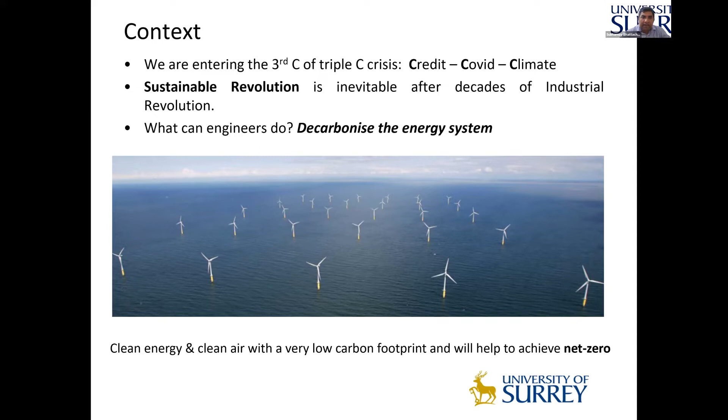Wind energy is not new. It has been used for centuries for sailing ships, sawing wood, grinding grains, and many more things. It is the oldest source of machine power, and this helped certain countries become a big power. In those days, whoever could make the largest number of ships or boats was most powerful because they could explore the whole world. Holland could produce cut wood and sawn wood using wind power, and that made them one of the pioneers of the industrial revolution. They could automate - they are the first country. So again, wind is nothing new.

And it is becoming a big industry - a $1 trillion industry by 2040, even more. So why is it sustainable? Because wind will blow as long as the sun is shining, since it is the sun that hits the land and water differentially, and that differential creates a change of pressure which drives the wind. So wind will always be there - as long as we have a solar system, the wind will be there.

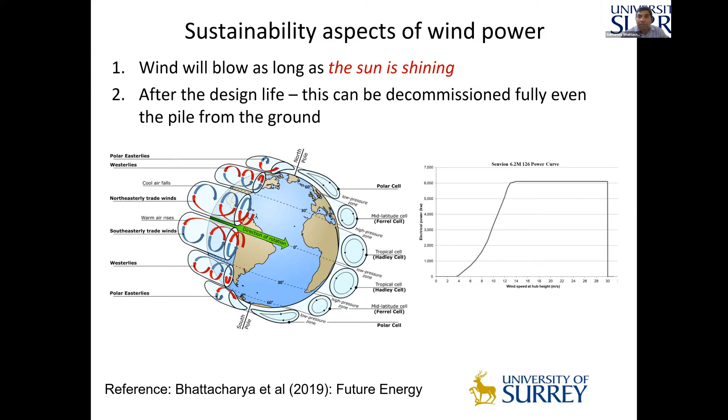Just to give an example, here is one of the first wind farms - this one is only a 500 kilowatt machine, so half a megawatt. It was built in 1992 and dismantled in 2016 after its full design life. I will show you this little video to show how we could completely decommission it from the sea - after harnessing the energy for its lifetime, we could completely dismantle the whole thing and give back the sea floor as it was.

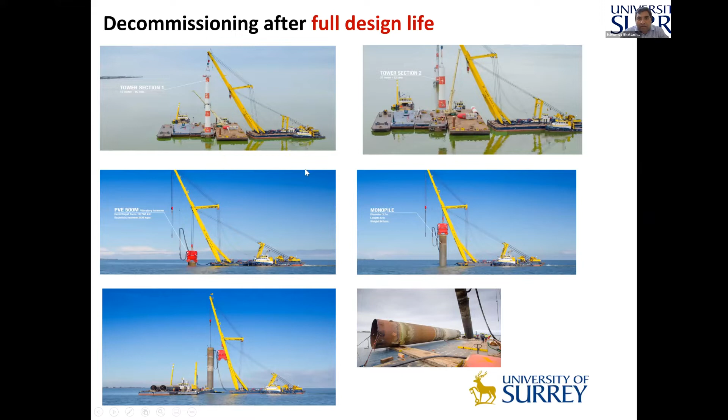So here are the steps for how to decommission. First of all, we take the top part out, the tower section, and then we gradually take the pile out of the ground. Okay, here's a little video.

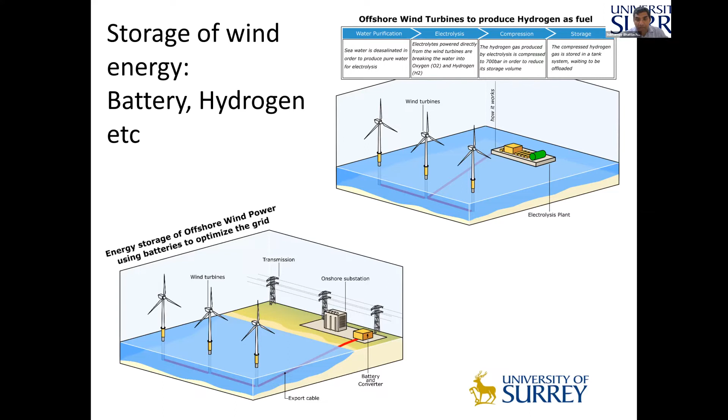This is one of the very important points of conflict. Some countries which produce oil are not politically stable, which creates problems.

Again, on the backdrop, it is wind that can produce the hydrogen and run the economy. So what I'm showing in the first part of this talk is that wind is a sustainable, possible solution for net zero, and it can facilitate the green hydrogen economy. The next economy will be the green hydrogen economy.

Also, what I'm not covering here is that nuclear power plant accidents are actually all linked with cooling power. What I've shown in some of my papers is that you need stable cooling power to make power plants safe in seismic areas, and wind turbines can provide that stable power.

There are also floating turbines as well, so that you can harness energy from deeper water, but that's for another day. You can read some of the papers in the reference for an idea about all these things. There are also some books that talk in a more general way about wind power and how it can help reduce the effect of climate change.

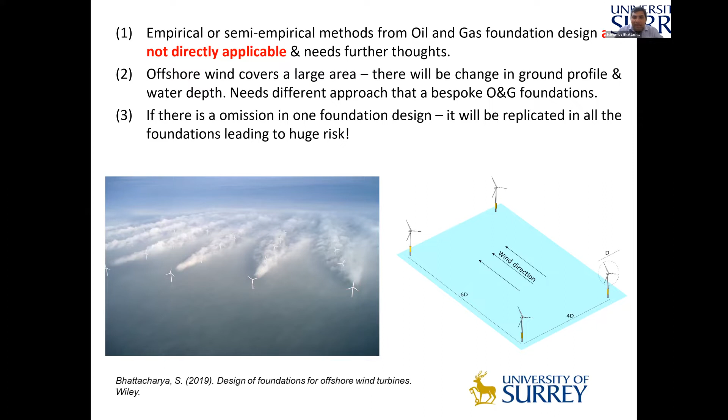As turbines get larger and larger, the tower gets longer and longer. Looking at an 8 megawatt turbine, it has a 110 meter long tower. At the top, you have a 550 ton mass, and each blade weighs roughly 30 tons. That's why they're built offshore, because you can easily bring these things offshore and put them there rather than onshore. Onshore, you can't scale it up as easily; it's very difficult to transport and carry large pieces of equipment, because the roads are not ready to carry big stuff.

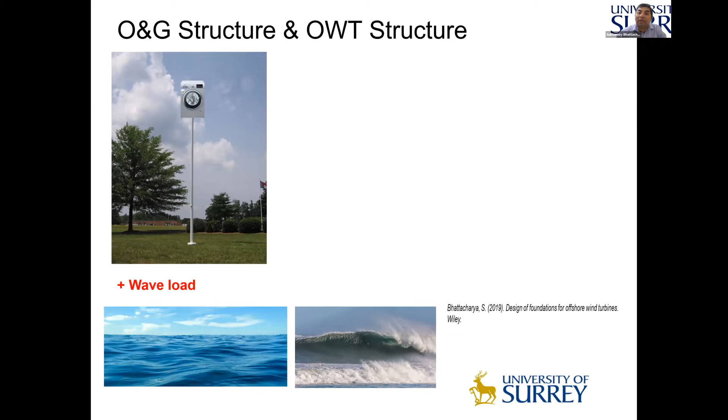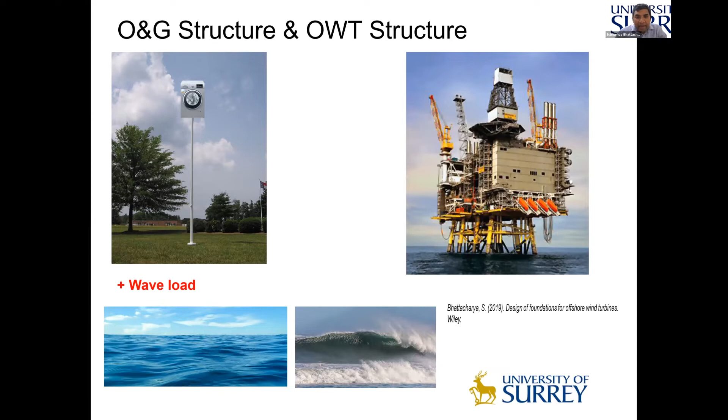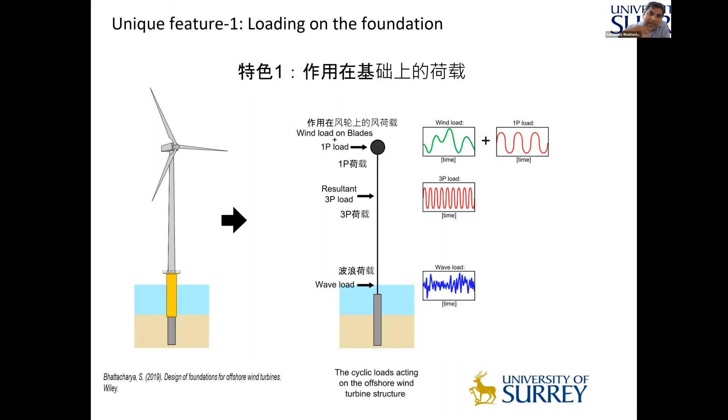The next big load is wave load, because if you put the structure in the sea, there will be waves slamming it, giving wave load. Apart from that, these are large machines, and you often have an imbalance of mass, which gives you a 1P load. There is also load on the tower, known as 3P tower load. These are the loads acting on the turbine all the time.

Let's look into the loads for just one minute. At the hub level, you get load from the wind, which can be thrust, and also imbalance of the blades. You also get wave loads at the bottom part, shown as a dynamic wave load, and then you get a 3P load in the tower. That's the load.

Because we have to have economy of scale, typically these days wind farms are about one gigawatt, meaning 1,000 megawatts of power. So you need a large area, and we are also farther away from the shore. As you go farther from the shore, the foundations also change.

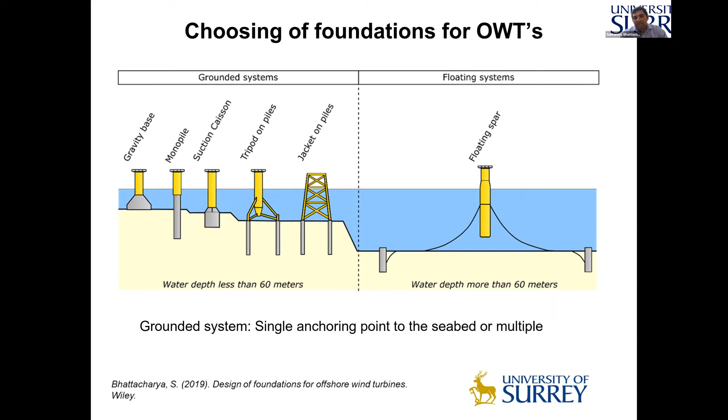In shallow water, in good soil conditions, you'll put a gravity base. As you go deeper, you start to put a monopile, meaning one large diameter pile. Then you use suction caissons, then move on to tripod, a jacket on pile. At 60 meters or more, you start to go into a floating system.

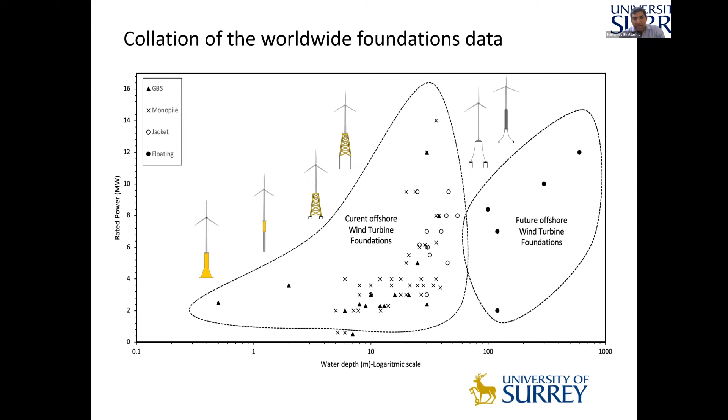Here is a figure showing water depth. In some places where the depth is more than 100 meters, you will only go for a floating system. This shows the current types of structures being used, and as water depth increases, you move from gravity base to floating. You can read all the design details in this book, published two years ago, which gives quite a bit of detail about the design and different parts.

What I am picking up here are the important points related to seismic design. One important part is the serviceability requirement for design, meaning these structures are typically designed for 30 years. So we have to predict the amount of tilt over the lifetime. In a seismic area, if the ground is liquefiable, there can be a tilt in the whole design.

How do you create the tilt, and what do we do to keep the tilt within a desired limit? There's a thing called the limit of warranty, which is theta limit - meaning the warranty is lost if that is breached. Typically 0.5 degree or 0.75 degree is the amount of tilt allowed after an earthquake or under any condition. The reasons matter because if the wind turbine tilts, there can be quite a few problems.

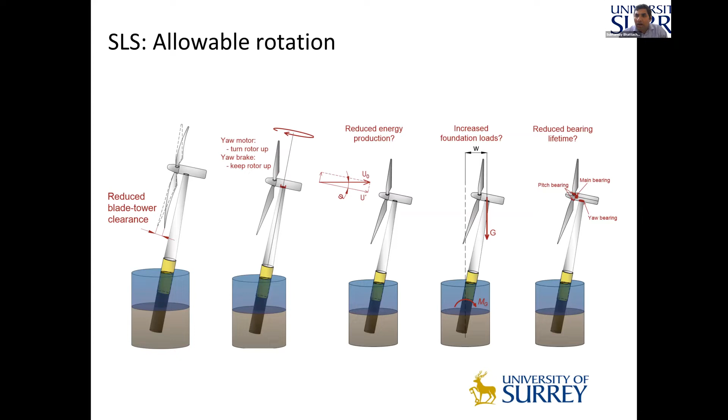For seismic design, the important part is the RNA acceleration. During an earthquake, one thing we must ensure is that the top machine does not accelerate more than 0.2G to 0.4G. There is still discussion about the exact amount, but typically 0.2G to 0.4G is the acceleration allowed at the top. So we have to make sure, through adequate stiffness or however we do the design, that this is not breached.

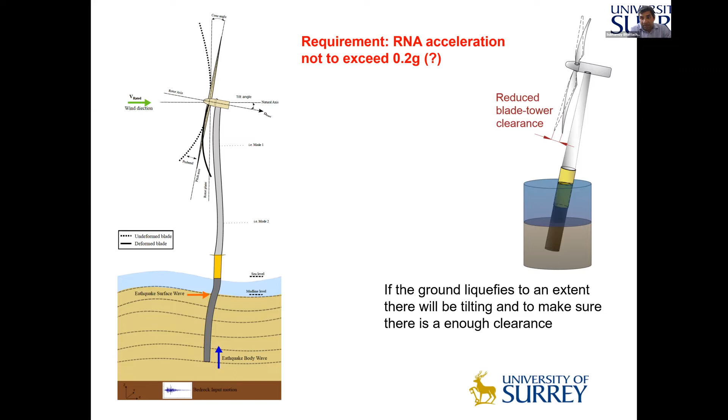Also, due to liquefaction, there can be some tilting. In terms of overall design considerations, there are quite a few: ultimate limit state, serviceability limit state, modes of vibration, fatigue limit state, as well as how you install, how you remove, robustness, and economics.

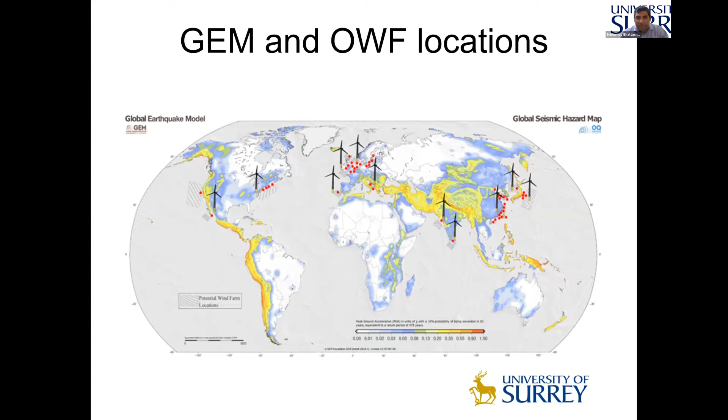So the main thing is we are building wind farms where there are quite a few issues to do with fault movement, shaking, and liquefaction, which can lead to various problems, and the risk increases as earthquake intensity goes higher. There can be a tsunami as well if the earthquake is more than 7.5 in some situations. So as a designer, one has to go through all the different steps to make sure the RNA acceleration is not exceeded and the structure doesn't tilt more than 0.5 or 0.75 degrees.

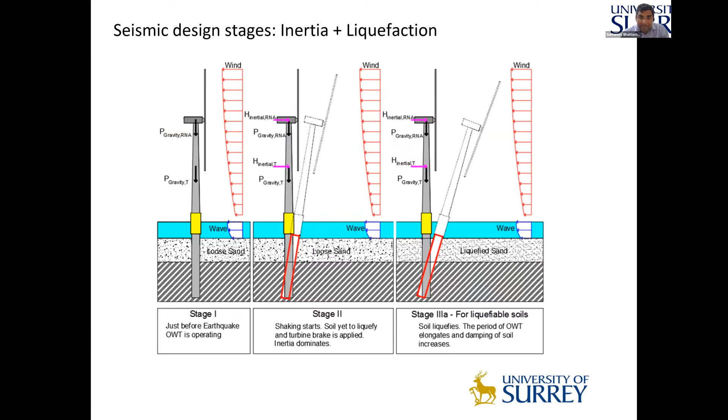Here are the different stages, and they are put on here. So one important part is how do you combine the effect of wind, wave, and earthquake?

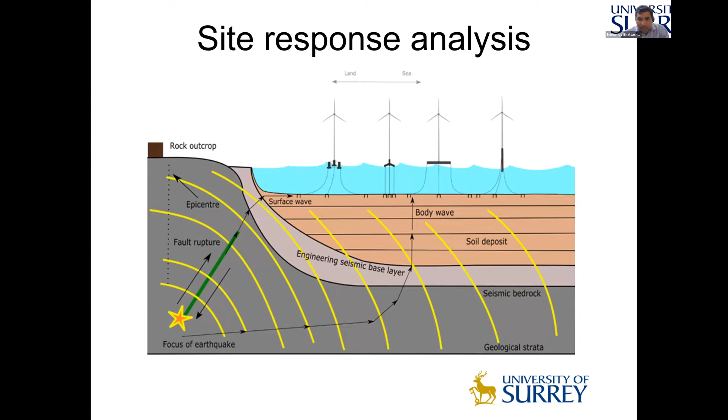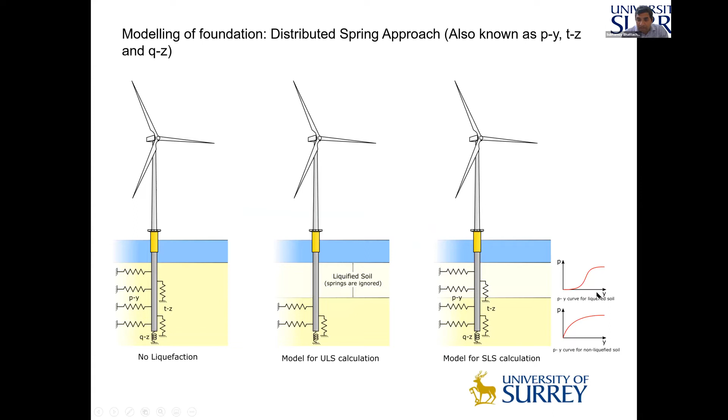We have to do a site response analysis to find out what happened to the ground. We have to put PY curves, but make sure that the PY curves comply with the requirement, meaning you must have zero resistance at the top, at small amounts of Y. So that's the PY curve for liquefiable soil, which must be used. You can read about this in a particular book, which I authored a couple of years ago.

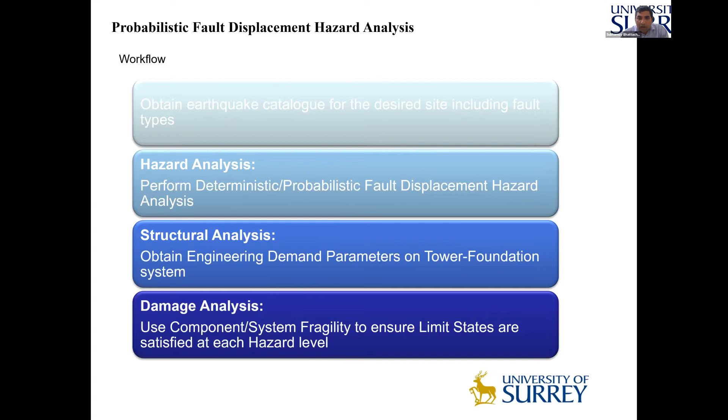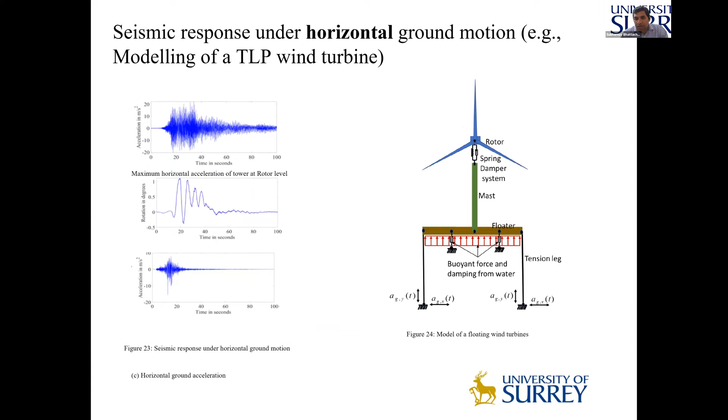For floating systems, we got to find out the fault rupture. We have to understand how much a fault rupture can induce movement in the whole system, and we can do the analysis based on that and provide adequate safety fuse and other things. Again, we have some analysis of the tension leg platform, giving a ground motion to see how it behaves, and that's for tension leg platform analysis.

To conclude, offshore wind turbines are an important component of future energy systems. We have to look into these systems more carefully. SLS criteria dominate the design. The important steps are assessment of seismic hazard at a given site, selection of strong motion, load combination criteria considering wind, wave, earthquake, and the control system design.

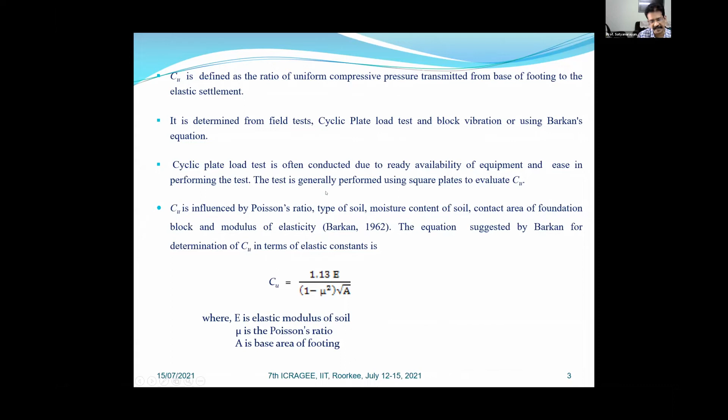So we can calculate, but finding elastic constants, particularly mu and E, requires precise testing in the laboratory. That's why the more common test that is done is the cyclic plate load test.

Looking at the definition of CU itself, P by Se, under a given pressure, the elastic settlement is definitely influenced by the shape of footing because of the pressure bulb. The shape of pressure bulb for square footing and circular footing is different. So for a given pressure, we are not going to have the same elastic settlement in a given soil, and hence CU is going to be affected.

So there is a need for evaluating a shape factor so that we can switch from values of CU determined for square test plates or square foundations to circular foundations.

Also, industrial establishments generally take place in the suburbs of cities or metropolitan areas, where you may have low-lying areas, and a lot of filling will be done. So generally conventional fill materials are used and compacted in layers, but due to increased demand and scarcity of conventional fill materials, people are planning to use alternate marginal soils, particularly in coastal areas.

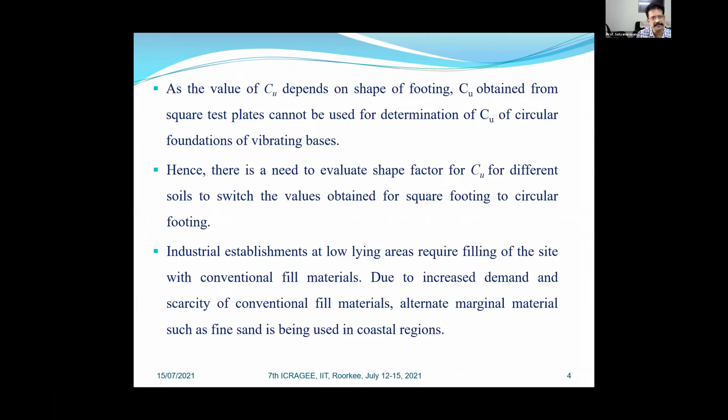Fine sand is predominant there, so efforts are being put to improve its properties, particularly to make it more resistant to possible liquefaction under saturated state. It is being stabilized by adding synthetic fibers.

So in the present study, an attempt is also made to evaluate the effect of shape of footing on CU of fiber reinforced fine sand.

Polypropylene fiber is used in small scale cyclic tests, because if at a site the prevailing soil is saturated clay, it is always practice to replace such saturated clayey soil with a granular fill. So if we are going for usage of fiber reinforced fine sand, we should also have knowledge on how CU changes and what the shape effects on CU are.

So the present lecture addresses all these issues.

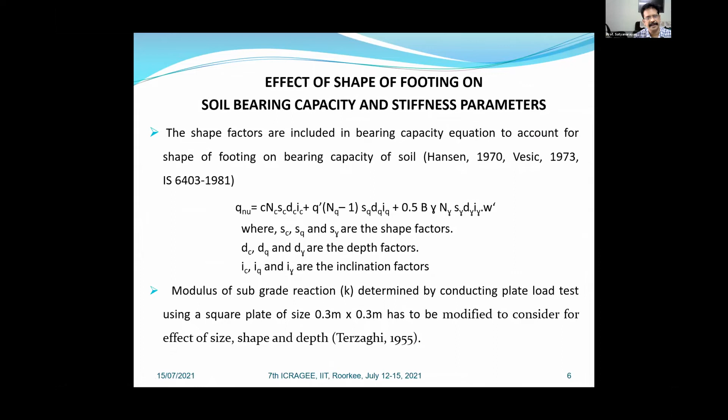As all of you know, the bearing capacity expression given by Hansen and adopted by our IS code, the net ultimate bearing capacity expression has factors including the effect of shape of foundation. Similarly, the modulus of subgrade reaction, which we determine from plate load test, we correct for size, shape, and depth. Similarly, our CU is also a stiffness indicating parameter, and the influence of shape needs to be accounted for.

So in the present study, we have studied the variation of CU for square shaped test plates and circular shaped test plates in 3 different soils, namely fine sand, clay of low compressibility, and clayey sand.

They are procured from sites within the Visakhapatnam city limits. Sand is collected from the beach near Tenneti Park area, and cohesive soils are procured from locations near Pedawaltair area, which is closer to Andhra University.

The properties of fine sand determined from laboratory tests are presented in this slide. It is containing 99% of sand particles, looking at coarse sand, medium sand, and fine sand fractions. Fine sand fraction is predominant, 68%, and fines are only 1%.

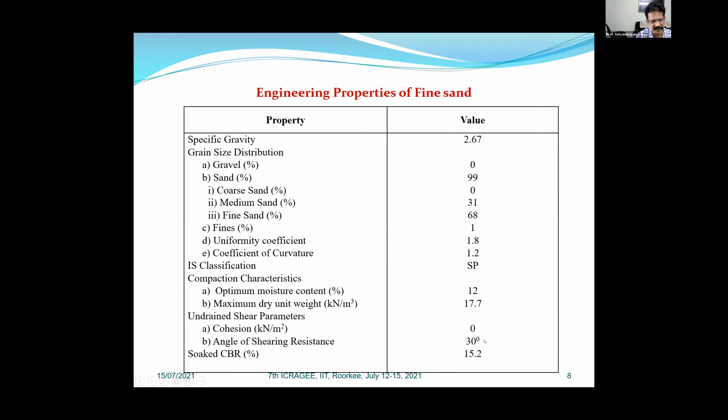Coming to gradation characteristics, CU is 1.8, CC is 1.2, and it got classified as poorly graded sand. Under heavy compaction conditions, the optimum moisture content was obtained as 12% with maximum dry unit weight of 17.7 kN per meter cube, and it had angle of shearing resistance of 30 degrees when tested in direct shear apparatus. CBR value, though determined, is not related to our present study, so I'm not mentioning it here.

Coming to the other two cohesive soils, one is clay of low compressibility, the other is clayey sand. Clay of low compressibility has fines of 84%, liquid limit 33, and it has undrained cohesion of 56 kilonewton per meter square with low angle of shearing resistance. Clayey sand has fines of 14%, liquid limit 32, and it has undrained cohesion of 16 kilopascals and angle of shear resistance of 25.

So these three soils are chosen for carrying out determination of coefficient of elastic uniform compression with respect to square and circular shaped test plates, as doing plate load test is laborious and time consuming.

So we made an attempt to do small scale cyclic load tests similar to cyclic plate load test in the laboratory, using the loading frame, using the CBR plunger of diameter 5 centimeter, and using a square plunger made with MS plate, having the size same as that of the CBR plunger, which is 5 centimeter. Only thing is CBR plunger is circular, the fabricated one is of square cross section.

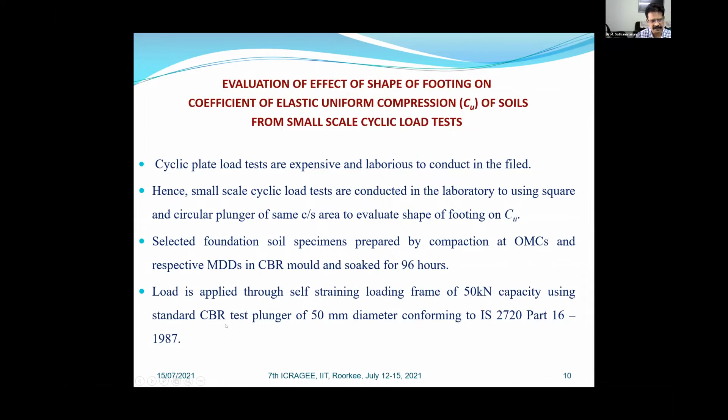So the load test is done in a 50 kilonewton self-straining loading frame, first with usage of the standard CBR test plunger. The load is applied on the specimen due to movement of the loading platform in upward direction, making the specimen compress between the proving ring and upward moving platform, which is measured with the help of a proving ring.

A surcharge plate of 5 kg is placed at the specimen surface, particularly in fine sand. Unless we confine it, its response we cannot properly get. Not only that, during soaking, unless there is some surcharge, there will be loosening of soil near the surface. For that, uniformly a surcharge load of 5 kg is used.

Prior to actual loading, a seating load of 7 kN per meter square is applied, and then the load is applied in increments of 1/10 of the selected test load. The selected test load is 200 kN per meter square and 150 kN per meter square, respectively, in fine sand and cohesive soils, because these values can be taken from any codes or literature. Presumptive bearing capacity values only are taken, as our intention is to study the elastic response of soil, so pressures of the order of expected bearing capacity in such soils are taken.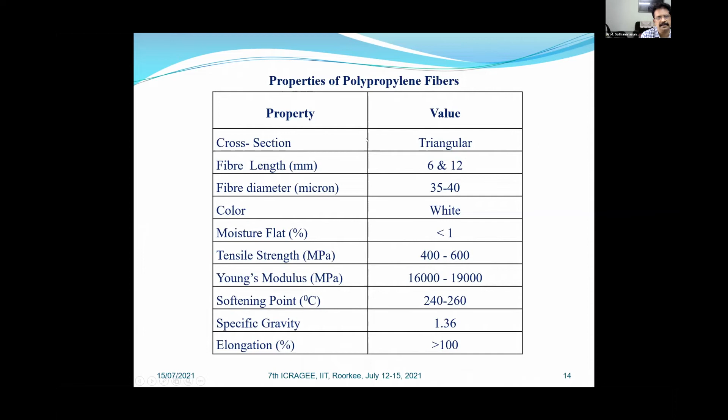Synthetic fibers used are of polypropylene origin, procured from Recron. 6 mm and 12 mm length fibers are used while reinforcing fine sand with fibers. All the properties reported here are adapted from the manufacturer sheet.

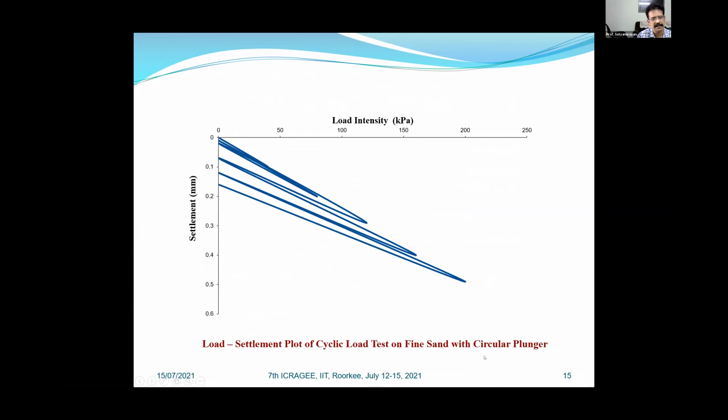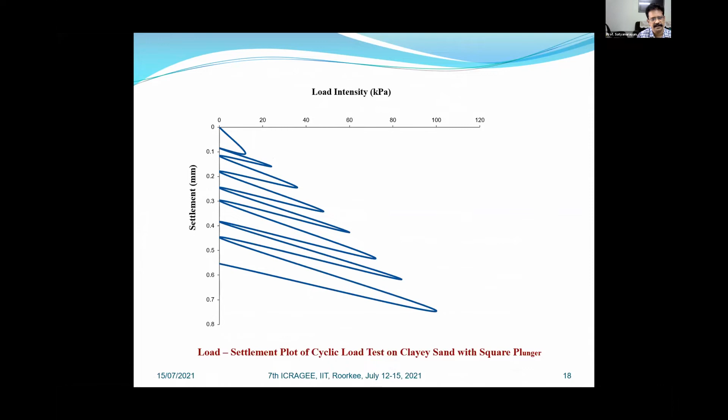These are the load settlement plots generated from small scale cyclic load tests performed on fine sand with circular plunger and square plunger. This is with regard to small scale cyclic load tests performed on clayey sand with circular plunger and square plunger, and on clay of low compressibility with respect to circular plunger and square plunger.

From this, plots are made between applied load intensity and elastic settlement. Since the intensity of loading selected is of the order of presumptive bearing capacities, the best fit is observed to pass through all the points, and the plot is observed to be almost linear.

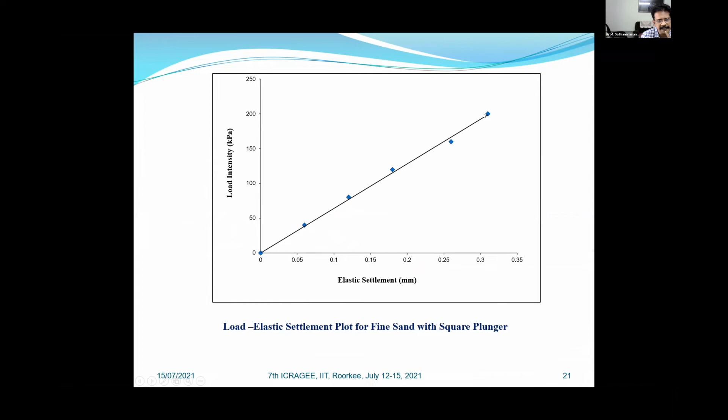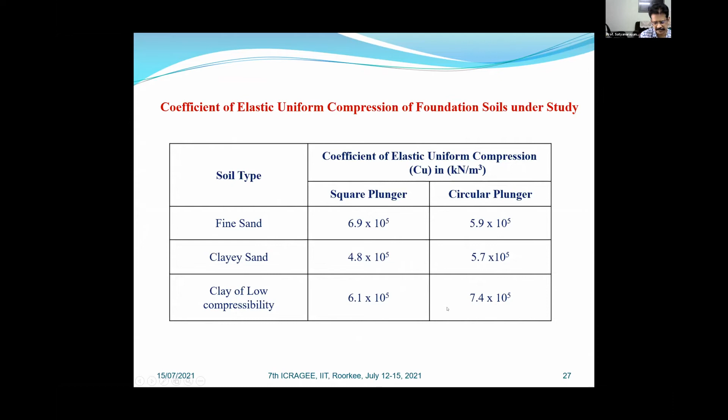Using the best fit lines and taking the slope, the values of Cu are worked out for the soils under study, namely fine sand, clayey sand, and clay of low compressibility. In fine sand, the value of Cu with respect to circular plate is smaller compared to square plunger, whereas in cohesive soils, that is clayey sand and CL type soil, for circular plunger, Cu value is more compared to square plunger.

If you take the ratio of values of Cu with respect to circular plunger and square plunger, the ratio is about 0.85 times. The reason for lower value of Cu for circular loading plunger is that the elastic modulus of sand underlying square loading plate will be higher compared to circular footing, because the base area is more, so more frictional resistance will be mobilized between the base of the loading plate and underlying soil, and more restrainment will be there to particles under load application.

Because of that, there is a lesser value for Cu with respect to circular shaped loading plunger. Coming to cohesive soils, as we know...

Even in terms of bearing capacity, irrespective of size of the foundation, the bearing capacity of soil is same. So for a given pressure P, if you look at the volume of soil contributing to settlement, in case of cohesive soils, more soil will be falling within the pressure bulb corresponding to the square plate. That's why, in the denominator, settlement is going to be more for cohesive soils receiving load through square plunger or test plate, and hence they will have lower value of Cu. That's why circular plate had a higher value. So the shape factor, taken as ratio of Cu of circular to square, is obtained as 1.2.

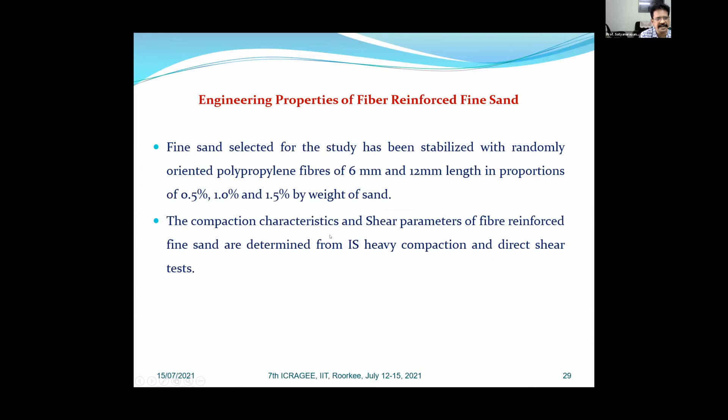After this, the study is extended to evaluate the effect of addition of polypropylene fiber of 6 mm and 12 mm length in various proportions of 0.5%, 1%, or 1.5% by weight of sand. To arrive at the optimum percentage of fiber, direct shear tests are performed to find where the angle of shear resistance is maximum.

For conducting direct shear tests, we need to prepare specimens corresponding to OMC-MDD condition, so heavy compaction tests are performed. You can see that, with regard to a given length of fiber, as percentage fiber content increased, OMC values increased gradually and MDD values decreased. Same is the case with the 12 mm fiber length also.

You can observe that a slightly higher value of OMC is there for 12 mm fiber compared to 6 mm, and the values of MDD are slightly higher compared to the values achieved for 6 mm fiber. The reasoning for this trend: lesser OMC requirement for 6 mm is because of its short length, it gets easily dispersed in soil, giving ease in compaction and allowing you to reach maximum density with respect to that particular fiber.

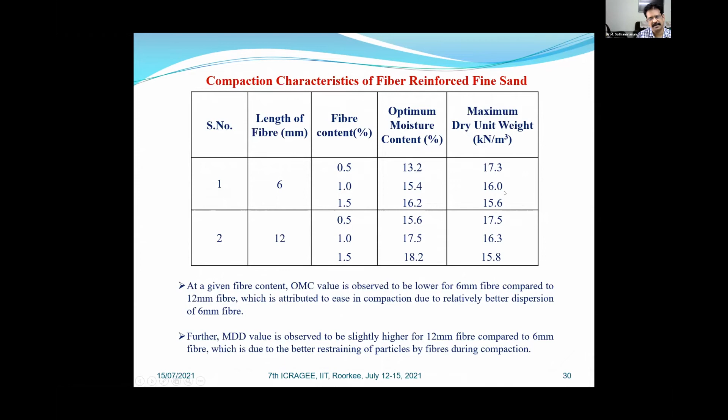Coming to 12 mm length fiber, it offers better restraining of particles, and whatever compaction energy is given becomes much more effective, resulting in better packing of particles. Though the values are nearer, there is a marginal increase, which we can attribute to the restraining effect of 12 mm fiber because of its higher aspect ratio compared to 6 mm.

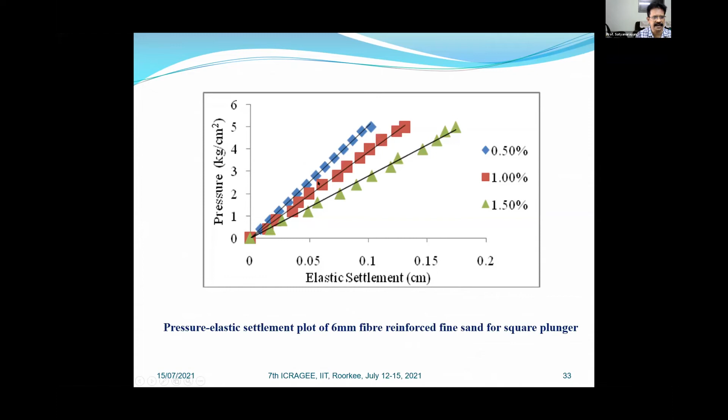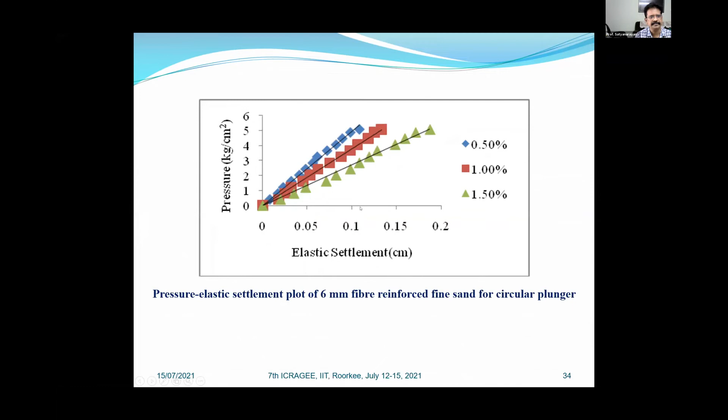Small scale cyclic load tests are performed on fiber reinforced soils using 6 mm and 12 mm fiber lengths, for both square and circular plungers. As percentage of fiber added to soil increased, the slope of pressure versus elastic settlement decreased, and the value of Cu is decreasing with increase in fiber content. You can see the same trend even with circular plunger.

Coming to 12 mm fiber reinforced fine sand, also same trend. For a given fiber length, as fiber content increases, the values of Cu are decreasing both for square and circular. With respect to square and circular, values are not differing much, meaning there is no shape effect as seen in case of fine sand.

The values of Cu are decreasing with increase in fiber content, irrespective of shape of plunger and fiber length. This we can attribute to increased elastic compression resulting from fiber replacement in fine sand. Compared to fine sand particles, polypropylene fiber is compressible.

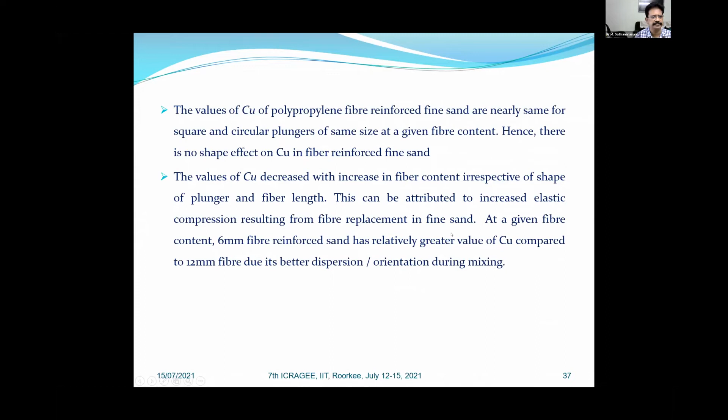Based on this study, the conclusions which we can draw: the value of Cu for circular vibrating base or foundation can be taken as 0.85 times the value of Cu of square vibrating base or foundation. In case of cohesive soil, like clay of low compressibility and clayey sand, the shape factor to transform value of square footing to circular plate is 1.2.

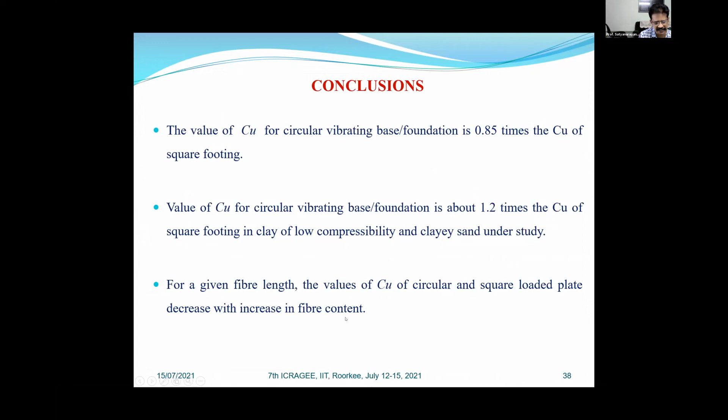For a given fiber length, the values of Cu for square and circular loaded plate decrease with increase in fiber content. In case of fiber reinforced sand, there is no effect of shape - whatever values we determine for square footing, we can use for circular footing. At 1% fiber content, the values of Cu for 6 and 12 mm fiber are decreased by 40% and 58% respectively.

I thank the organizing committee for giving me this wonderful opportunity to share some of our work related to coefficient of elastic uniform compression. Thank you. If there are any questions, I'll be happy to take them and try to answer.

Thank you very much, Professor Satyanarayana Reddy, for a very informative and interesting talk. I request Vikas to quickly take 1 or 2 questions. There is no question in the question session. But I have one question for you, sir.

What is the effect of aspect ratio on this Cu value? If we change the aspect ratio of fibers, what is the difference in the value of Cu we can see? Cu is decreasing - the last conclusion I have shown, I think. Shall I show that presentation? Values of Cu for 6 mm and 12 mm decreased by 40% and 58%.

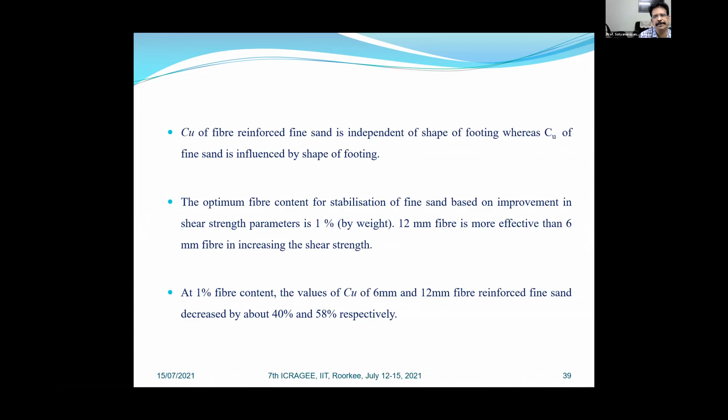Is there any effect of orientation of fiber? This is randomly oriented, because we cannot keep fiber in a particular orientation, just like reinforcing sheets. It is randomly distributed fiber reinforced sand. Thank you very much, Professor Satyanarayana Reddy.

One small question - any recommendations for field? Because you must have done this lab test, when you apply this in field, how to do it practically? The mixing of fibers may not happen properly, and to what depth? Just like our reinforced soil bed, we replace weak soil to a depth of about B to 1.25 B. So there we can replace clay soil with fiber reinforced sand and achieve its benefits. Thank you very much for a very informative lecture.

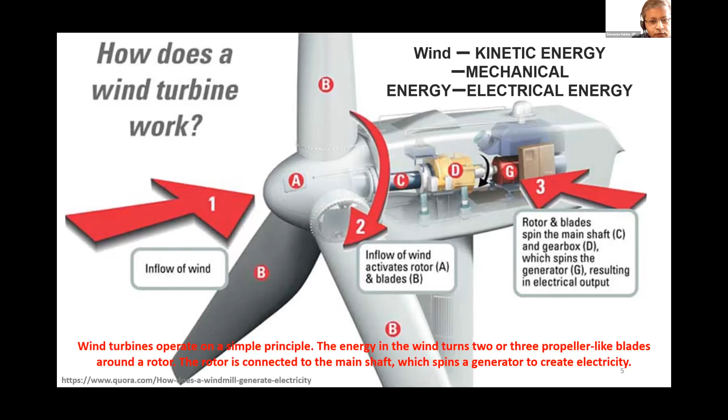So this is how a wind turbine works - it's a very simple methodology. Basically, wind energy as kinetic energy is converted to electrical energy due to the rotation of the propeller. It's mostly a three-bladed wind turbine, horizontal axis wind turbine. And these are the components of the offshore wind turbine, which you've already seen in the last presentation.

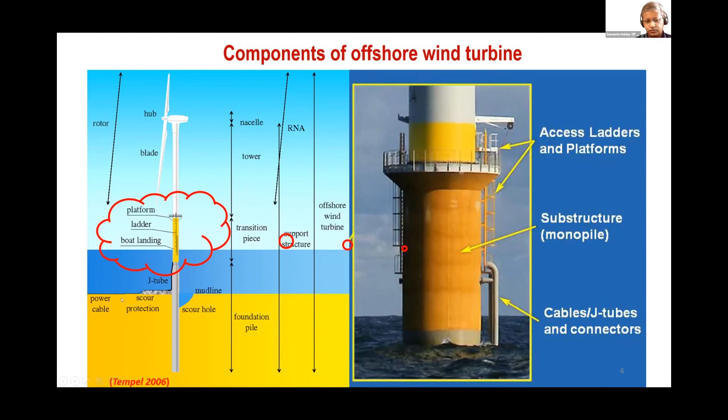The future trend, as explained in the previous presentation, is moving towards very large capacity wind turbines. We started with a small range of wind turbines, but now we are looking into large wind turbines. As the wind turbine capacity increases, it will also substantially increase the size, the rotor diameter, and the height of the wind turbine enormously.

Bigger, cheaper, and greener turbines can produce more wind energy. As wind energy and wind turbine size increase, design challenges will also increase. I'll talk about a couple of important design challenges in seismically active areas, and then discuss the requirements of foundations related to seismic liquefaction and other issues.

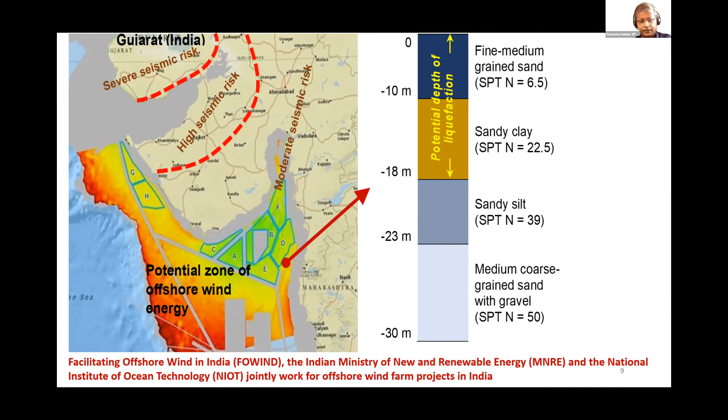In addition, there are various other loads, as already shown, including a combination of wind load, wave load, and seismic load. If liquefaction happens, that may give an additional challenge to the designer. These are a couple of common things already explained, so I won't talk much about these loads on the wind turbine.

As we know, the wind turbine can have several types of load components. At the hub height, there is thrust load, and tower drag acts on the tower side. Similarly, wave load acts at the mean sea level, and current load may also act. These are the general operational loads that act on the wind turbine.

In addition, there is the 1P load, which depends on the rotational speed of the wind turbine. It is more or less due to mass imbalance of the wind turbine blade, and the 1P load generally acts in the side-to-side direction.

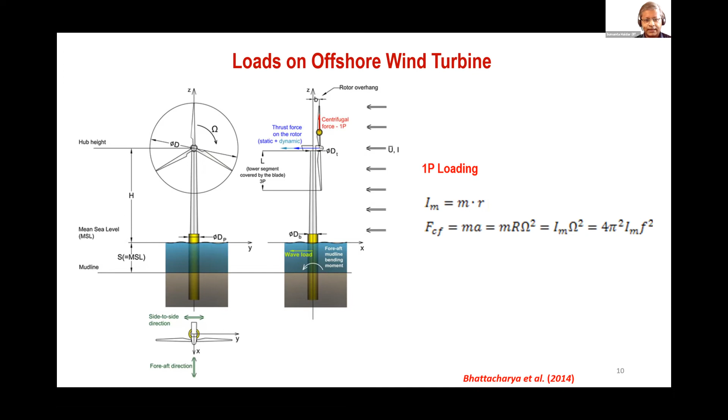Another type of load is called the 3P loading, due to the tower shadowing effect. When the blade rotates and covers the wind turbine tower, because of this shading effect, the frequency of the load is 3 times the operational frequency. The 3P load and the hub load can be estimated based on thrust calculation.

Similarly, wave load may also act, which is dynamic in nature. Various wave theories are applicable for different types of water depth. For different water depths, you can apply different wave equations to find the wave loading. I'm not going into the detail of wave load calculation.

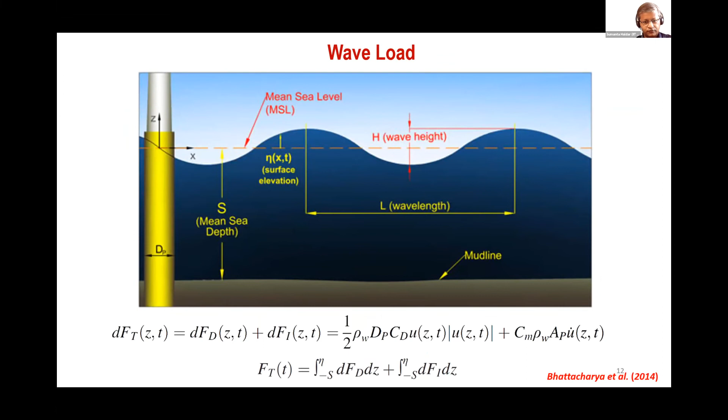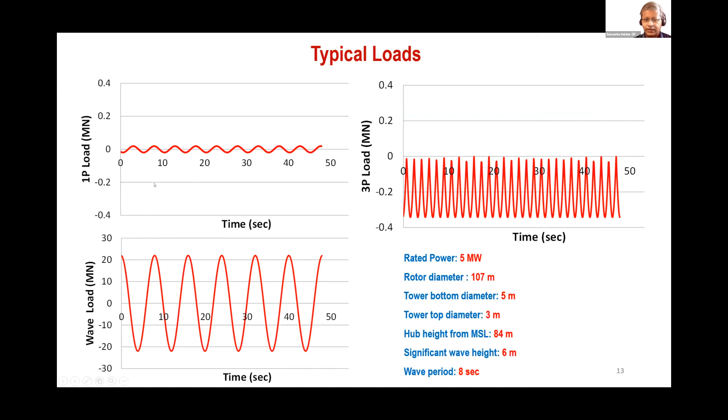These are the typical loading patterns. The 1P load pattern is a kind of cyclic, harmonic load, while the 3P load is a one-way cyclic load, along with the wave load. These are the estimated loads and their typical nature during operational conditions. In addition, in seismically active areas, we need to consider the seismic load.

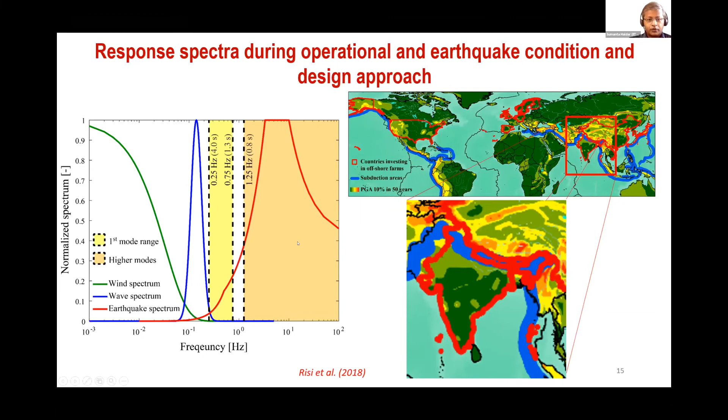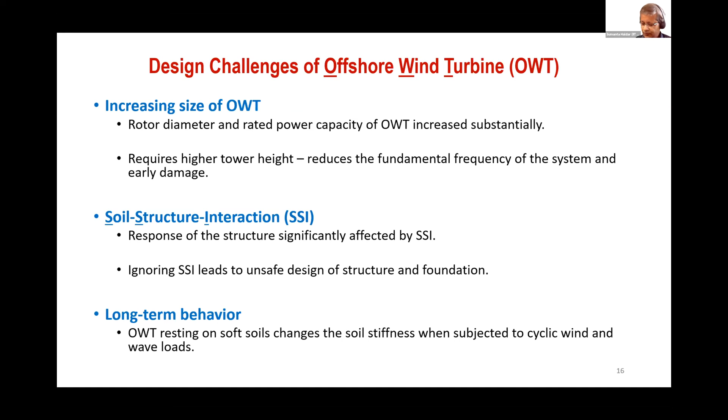The design challenges mostly lie with the size increase. As the size increases, it can reduce the fundamental or natural frequency of the system, which may lead to early damage. The next interesting issue is soil structure interaction—ignoring SSI may lead to unsafe design of the structure and foundation, and we have already done a couple of studies on that. The third and most important part is long-term behavior: the offshore wind turbine is exposed to millions of load cycles, and it's very challenging to determine what happens to soil stiffness under such high cyclic loading.

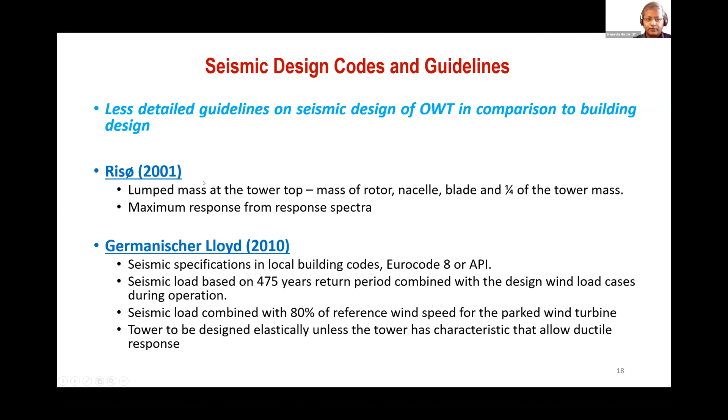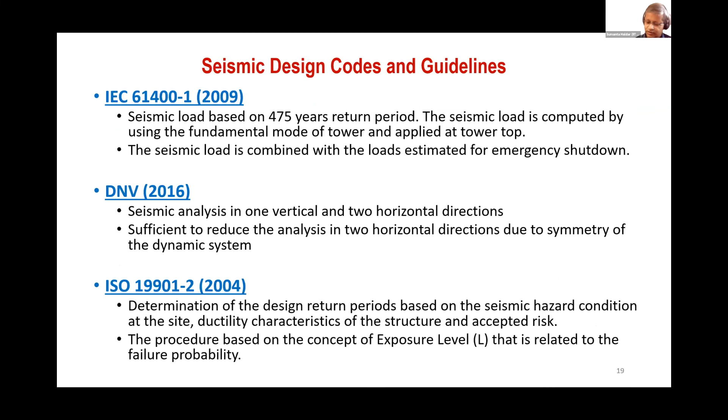Regarding seismic codes and guidelines, we actually have very few detailed or comprehensive guidelines pertaining to seismic design of offshore wind turbines. There is a requirement to develop a detailed seismic guideline, especially for offshore wind turbines—it is a big challenge and a novel task, particularly for liquefiable deposits. Available guidelines include ISO, GL (German code), IEC, and DNV codes, but nowhere is there detailed explanation of the guideline for liquefiable soil sites. So we have done some studies on this.

One interesting fact concerns the operational condition and the parked condition—these are the different load cases we generally consider for the design of wind turbines under seismic loading. The natural frequency of the offshore wind turbine is mostly about 0.3 Hz, so it is generally less vulnerable to low to moderate earthquake shaking.

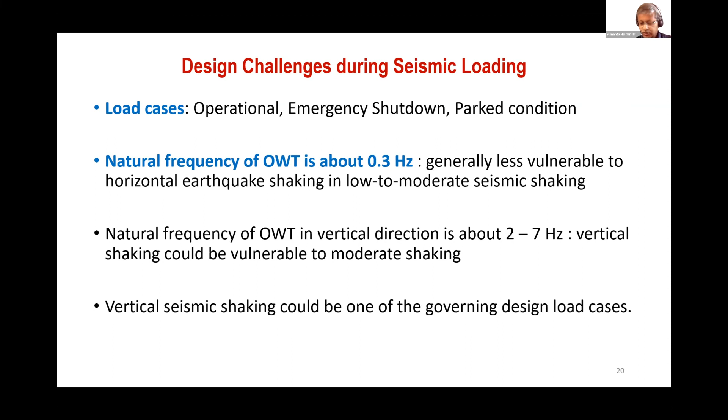But in case of other types of motion, like if we include the vertical component of the motion, which has a predominant frequency very close to the natural frequency in the vertical direction, there is a possibility of damage in the offshore wind turbine due to the vertical component. So vertical seismic motion could be vulnerable.

Various other issues like the consequence of liquefaction, I would like to show a couple of slides here, like the impact of the stiffness degradation. In general, if we consider the liquefiable deposit, that may reduce the foundation support of the monopile foundation, which may lead to a change in mode of vibration.

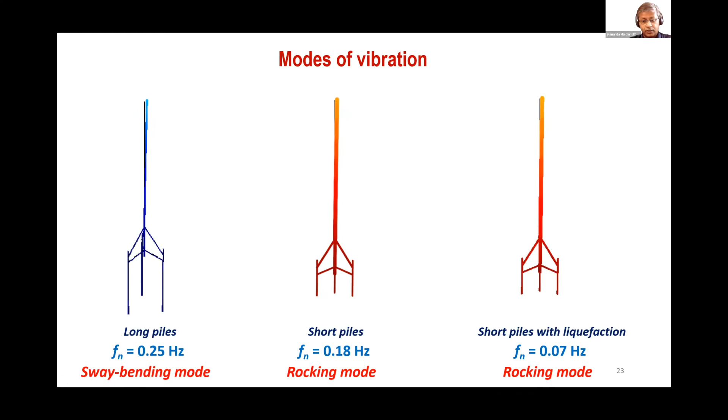Excuse me sir, just 2 minutes more sir. I'll come to that, yeah.

The conclusion. We have done some studies on liquefiable deposits, to see what would be the impact on the design response. This is a numerical model we have developed in OpenSees. It's a coupled model where the liquefiable soil deposit and the soil structure interaction both are incorporated.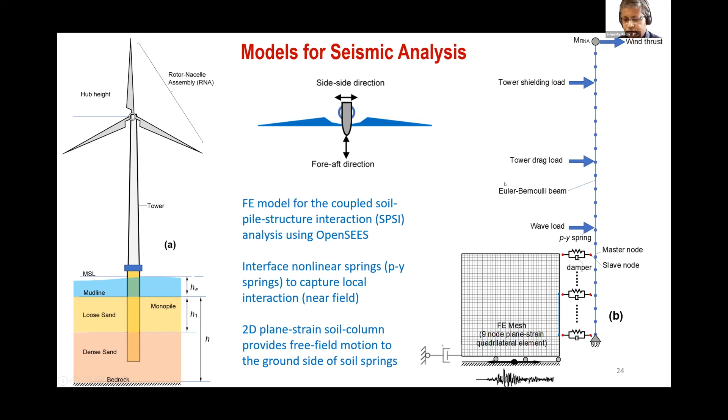When the seismic motion is applied, some depth of liquefaction occurs depending upon the soil type and the seismic motion. The depth of liquefaction can be easily determined from the plane strain analysis. Due to this seismic liquefaction, there is a possibility of alteration of the ground response, which will give an impact on the response of the entire structure. This part we have already modeled in the coupled model developed in OpenSees.

These are the different seismic motions we have considered. We have considered 5 motions and their properties. I will not go into the details of each individual motion. Coming to the response.

First of all, we have studied the depth of liquefaction, and we found that the sustained maximum acceleration is a better way of representing, or a more rational representation of the damage during the seismic event, rather than the peak acceleration. The sustained maximum acceleration basically plays a major role in the depth of liquefaction calculation.

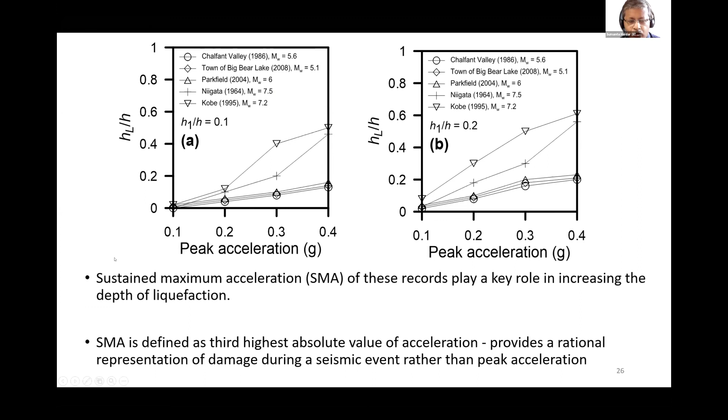These are the different responses that we have obtained from the combination of operational and seismic loading, in presence of liquefaction for different depths of liquefaction. H1 over H is a representation of the depth of liquefaction, in normalized form. If the depth of liquefaction increases, there is definitely a possibility of exceeding the limiting tilt.

What we have observed is that the non-dimensional response is found to be more in case of the park condition, because in case of park foundation, the overall load magnitude is less. So if you compare with respect to the operational condition, the amplification is more in case of park condition.

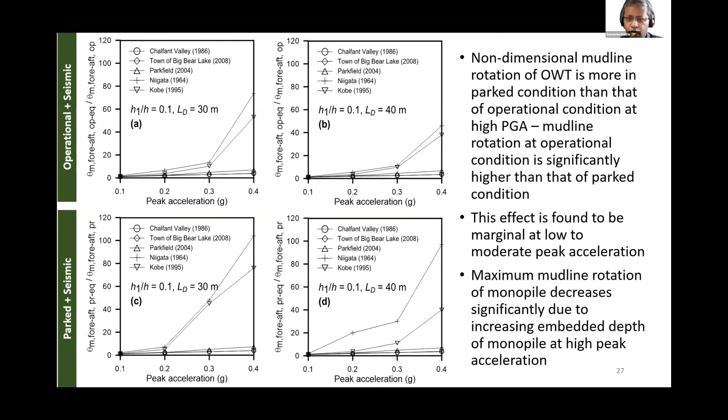Another interesting observation is when we compare two different earthquake motions, the Niigata motion and the Kobe motion. What we have seen is that the Niigata motion gives a higher response, mainly due to the amplification at the Nacelle level. You can see a kind of amplification here, a ring-shaped decay pattern identified at the Nacelle level, and it is basically due to resonance.

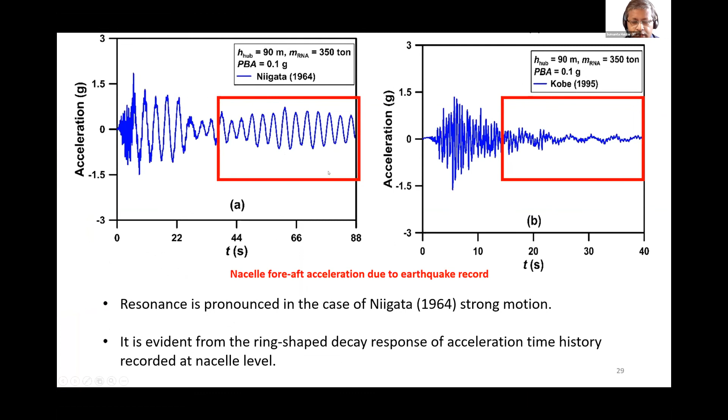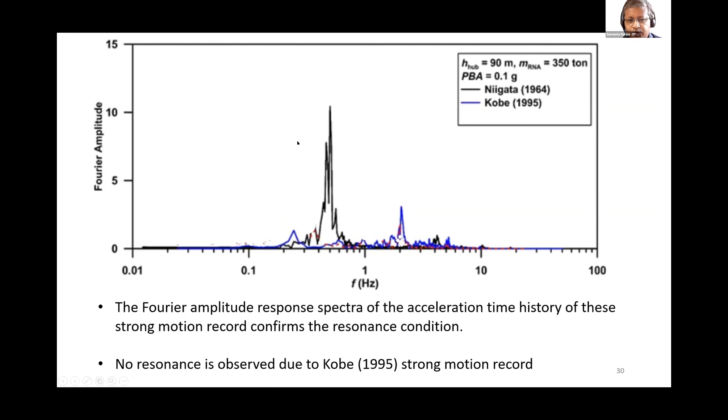As the Niigata earthquake motion's frequency content is close to the natural frequency of the offshore wind turbine, we have got a similar kind of resonating response, which is also very much clear from the Fourier spectrum. You can see the black color spectrum, which is due to the Niigata motion, is significantly high.

A couple of slides are left. For vibration modes, here we are trying to show the impact of the vertical motion. What we have done is tried to find out the mass participation factor, for no liquefaction condition and the 10-meter depth of liquefaction condition, for different capacity wind turbines like 5 megawatt to 15 megawatt wind turbines.

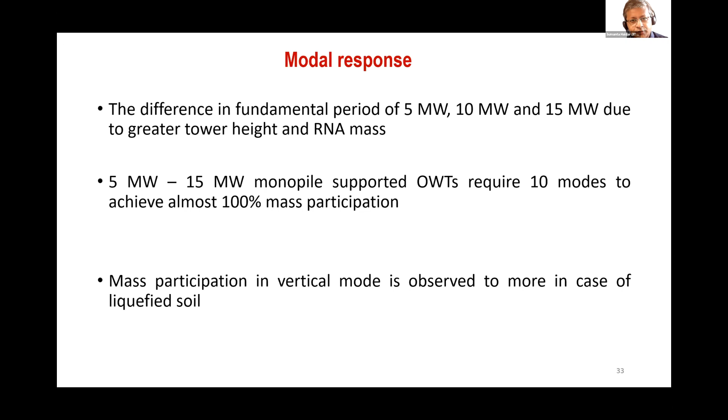So what we have got is that around 10 modes are required to achieve 100% mass participation, and the vertical mode is observed more in case of liquefied soil, which gives an important conclusion that the impact of vertical motion needs to be included, especially for offshore, and higher modes need to be considered. These are the concluding remarks I would like to highlight here.

We have also got some interesting information: especially in case of low to moderate earthquake loading, the operational condition with wind and wave load is dominating, whereas in case of a large seismic event, the seismic load is dominating. This needs to be considered in the seismic design of offshore wind turbines.

Also, we have seen that the embedded length has a greater impact as compared to the diameter and thickness of the monopile. So basically it's a task for the designers - you need to consider an optimal foundation size in order to overcome the liquefaction effect on the offshore wind turbine. Thank you for your attention.

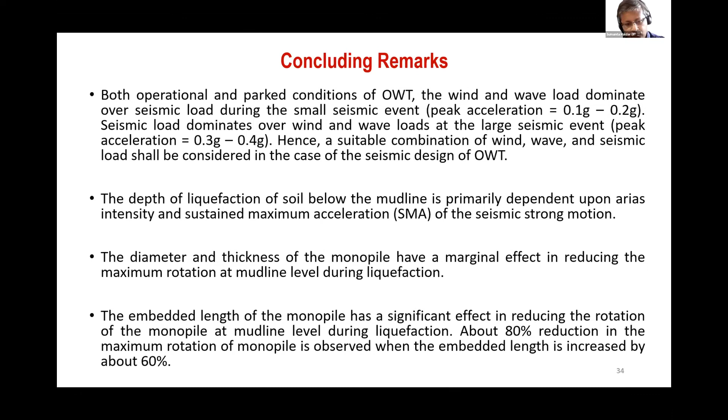Thank you very much, Professor Sumanta, and finishing it in time. Dr. Vikas, can you ask quickly one question please? I think there is no question in the question part. Okay, the same question is there, sir.

I think you and Professor Subhamoy Bhattacharya explained the things very well - starting from the OWT technology, then what are the components of the OWT, and how we can design this technology, or use the wind technology for wind power from the Indian green energy point of view. Thank you very much, sir, for this nice presentation.

Thank you Subhamoy sir, Satyanarayan Reddy and Sumanta Haldar sir for excellent presentations. We had a very good interactive session here - session number 29 of this conference, wherein three interesting talks were presented on challenges in design and construction of offshore wind turbine foundations in seismic areas, by Professor Sumanta and Subhamoy Bhattacharya.

Satyanarayan Reddy presented on the effect of shape of footing on coefficient of elastic uniform compression, discussing the effects of fiber reinforcement on different types of soils. Sumanta Haldar sir presented a nice talk on the dynamic response of monopile supported offshore wind turbines in liquefiable soils, with a detailed study of the design aspects and responses in liquefiable soil. We had excellent presentations, and I thank all three speakers for these excellent talks.